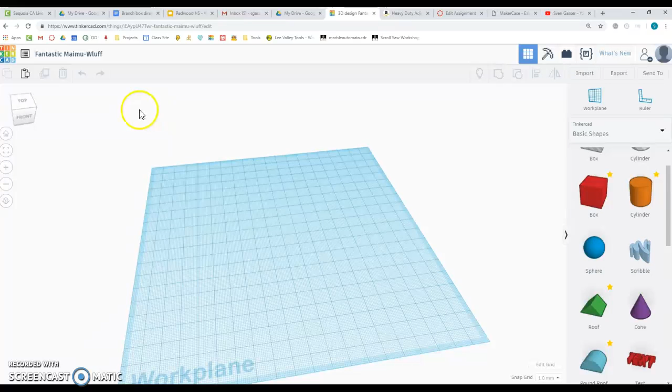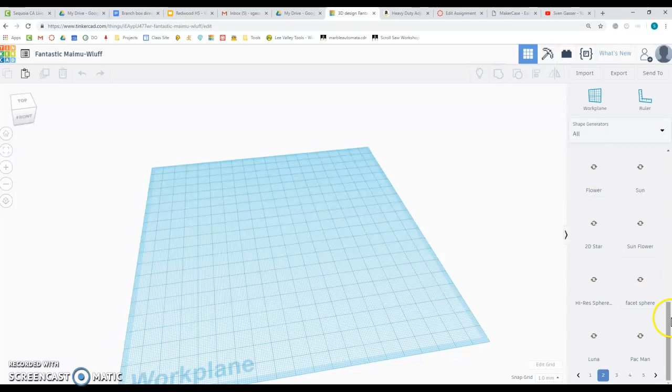I'm opening a new design in TinkerCAD, and we're going to shape generators. We have a lot of different generators here, including some gears. I recommend starting with this one that's gray, called the useful gear. That's a nice one to start us off using. The other ones will work too, but this one has some different parameters. So try out this one for now.

Now I'm looking straight down at it, and I'm going to click this to make it orthographic view so I can not see the edges, so it's looking exactly like I'm going to get it here.

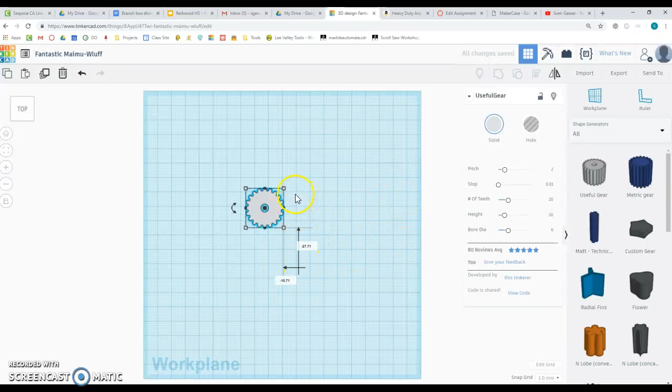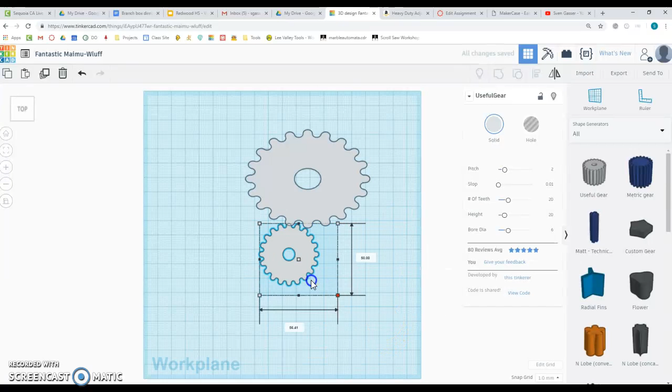In the past, a big thing we've done to resize things is drag this around and make things a different size. If you have a gear that's not round, you're going to have some issues. Also, if you just stretch this, the size of those teeth will change. So if I have this gear and let's say this other gear, these two gears are not going to work together because those teeth aren't going to mesh well. So do not do this. Let's get rid of both of these gears and start from the beginning again. When you put one out here, all your changes will happen over here. Do not drag and grab these, okay? Do not do that.

Pitch is the size of each tooth. So if you're making a whole bunch of gears, you need to keep the pitch the same.

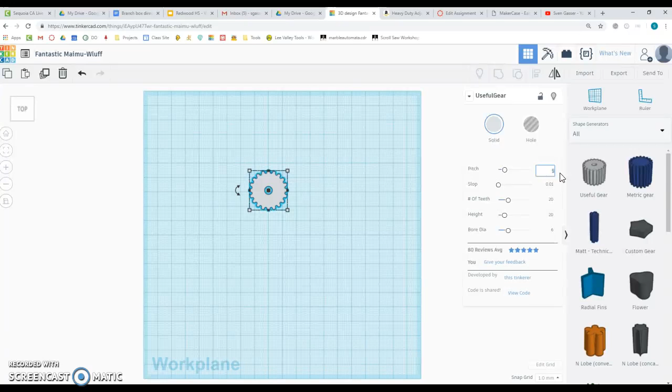I'm going to make my pitch a little larger. This is in millimeters right now, so I'm thinking like 4 might be a good number for me. That gives me a little bit bigger teeth, which might work a little nicer on the laser cutter. If they're too small, the laser cutter just burns all the teeth away, basically.

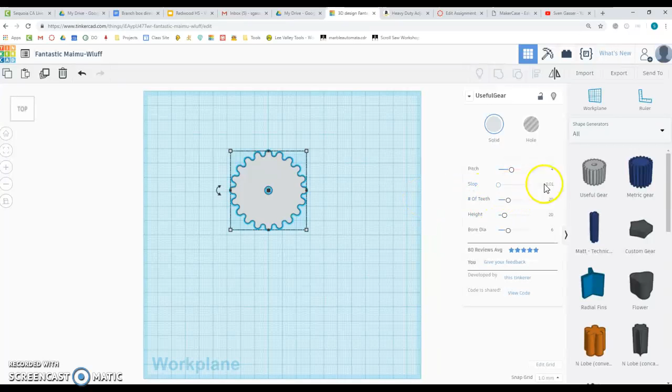Slop is how loose the teeth are, how much spacing there is between the teeth, and don't worry about that too much right now. Number of teeth is pretty self-explanatory - it's how many teeth you want on your gear. Height doesn't really matter for us; that's how tall the gear is, but since we're laser cutting, that doesn't matter.

Bore diameter is going to be an important one - that's how big the hole is. Before you design all this, you need to think about how big this hole should be in the center. What are you going to be putting in that hole? Is it a nail, a bolt, a screw, or a dowel? Before you go too far, you need to measure that, and remember this is in millimeters. So if you're putting a nail in there, this is not 6 inches - that would be really big. This would be 6 millimeters.

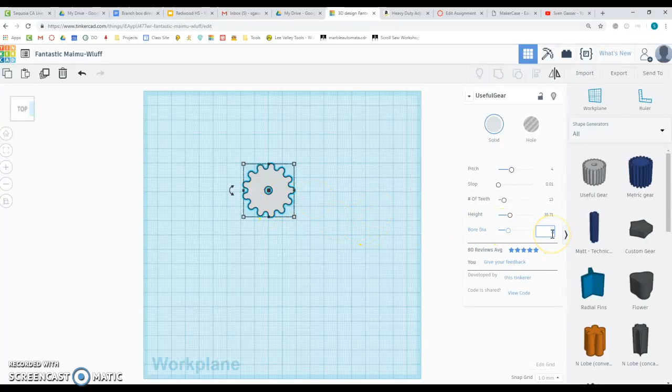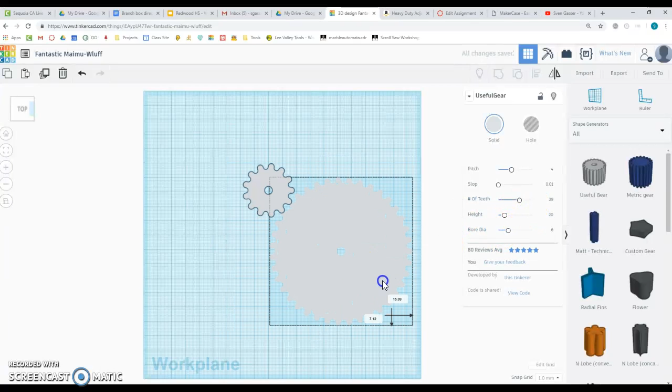Change this number around. Now once you know one gear, remember the pitch is the important one - I've got to keep pitch the same. So when I pull out another gear here, we can tell right away these are not going to fit together. Let's change that. I want to keep that as 4. Maybe I want more teeth on this one, and we want to make that bore diameter the same also. Give it a second - sometimes it needs a second to update.

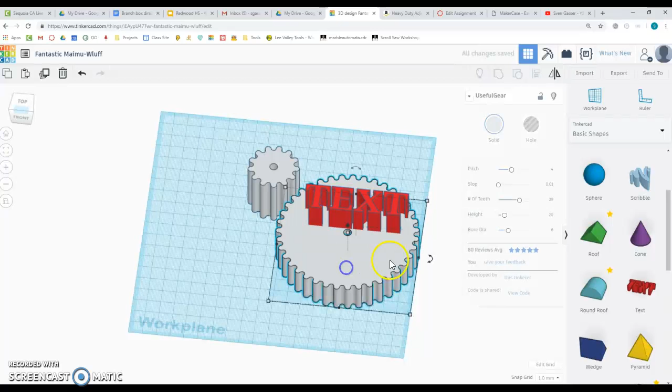As you've seen in my examples in class, we can still put text and write things on them if you want. You can put some text on your gear and say how many teeth it has - one thing that's kind of useful is writing the number of teeth on it. So maybe this one is 39.

Just as before, when you go to export these, you'll export them as a cut file. And if you have something drawn on it, you can have that exported separately.